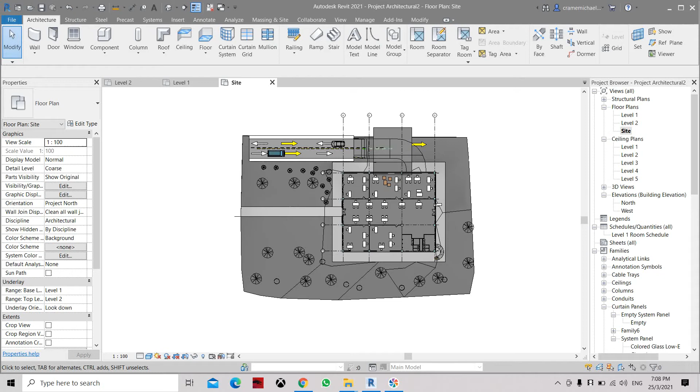Here we have the architectural plans coming from the architect. When we go to level 1, you can see that this is the architectural plans they have provided. But we couldn't find the internal origin or the project base point or survey point. We haven't found it yet.

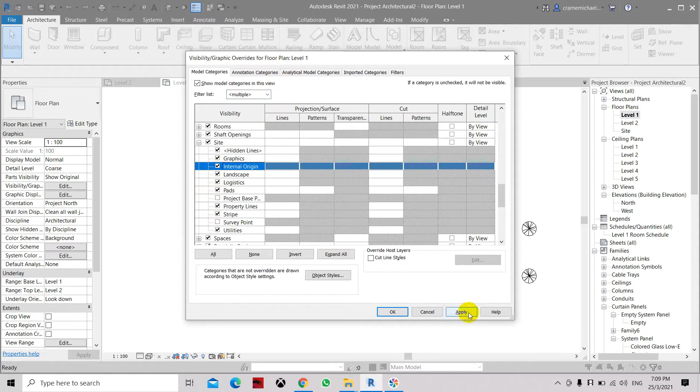So basically, if you could not locate it, you have to go to VG, or visibility graphics, in your floor plan properties. Under the model categories, you have to filter to architecture, make sure architecture is checked. And under the architecture, you have to scroll down to site, expand the site, and here you can find the internal origin. Let's check this and click apply and click OK.

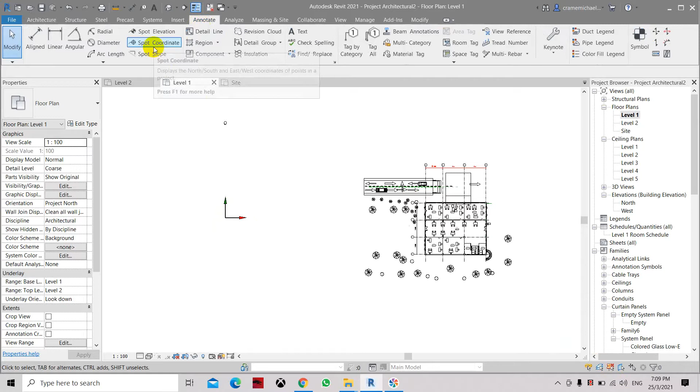Now you would see this is the internal origin which is supposed to be here. Let's see if we can still select it. Currently at the moment we could not select it. By right, we should be able to select it, and let's place a spot coordinate. Let's see what it is: it's 0, 0, 0. So it's in the correct position. Let's set 500. See this? It's in the correct position, which is 0, 0.

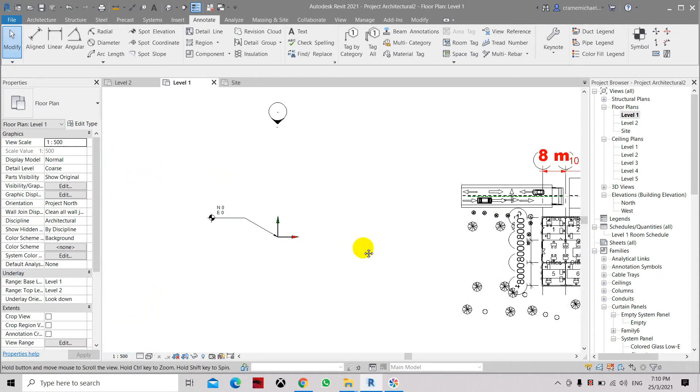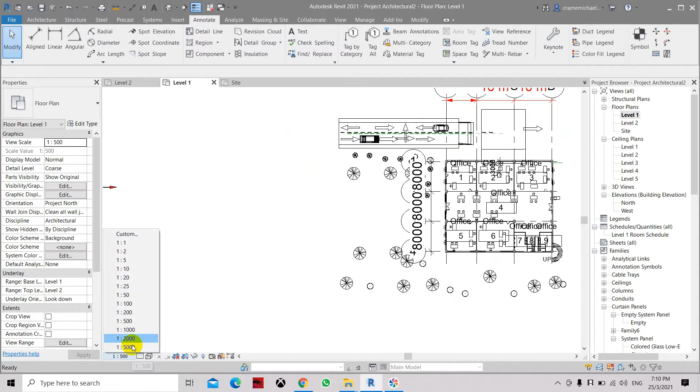A word of advice: just make sure that the internal origin is not moved, as it is typically the main reference point for any drawing or model. So make sure you don't move the internal origin. You can place the first two grids of the drawing at the center of the origin, but do not move the origin.

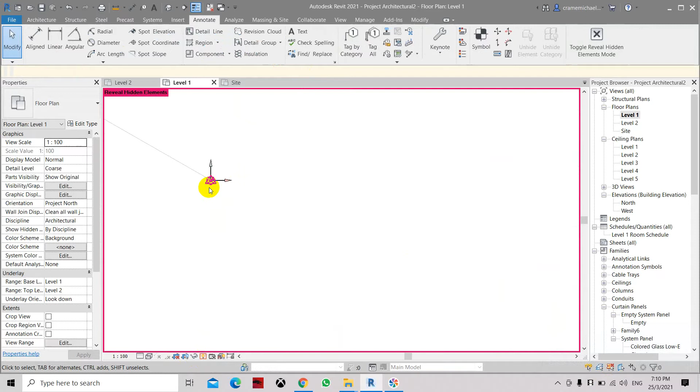Actually, here you also cannot select it. By right, we should be able to. Oh, it's hidden. Like this. So there is the survey point and also the project base point. You can also use reveal hidden elements to locate the internal origin, and here you can select it and select unhide category. So now let's close this.

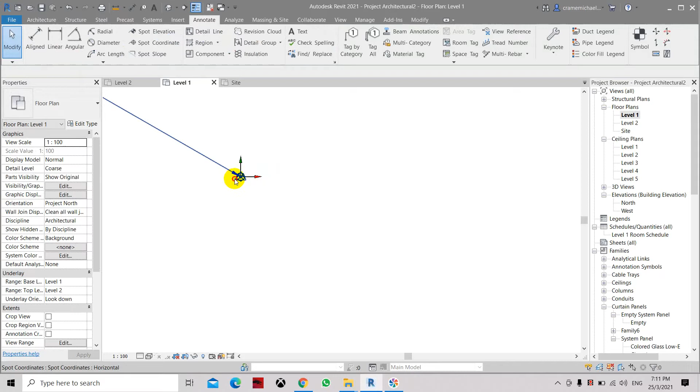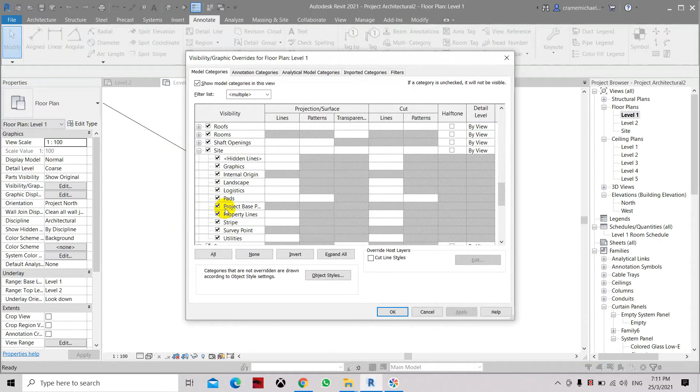Here you can find the project base point, which is shared, and also the survey point. So we have to select them one by one. We're trying to zoom in. So this is the spot coordinate and survey point. So let's hide the internal origin so we can see the survey point and project base point, how it looks. Click apply and click OK.

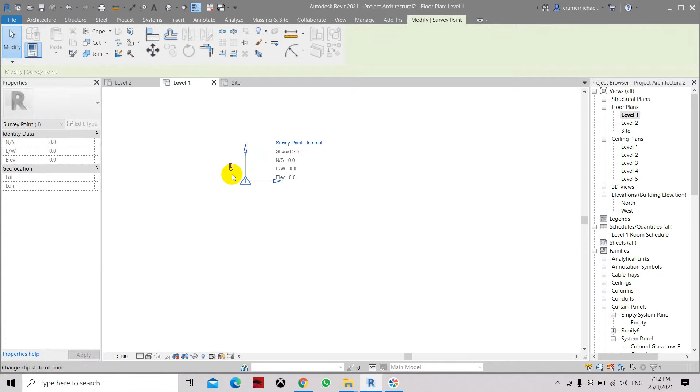This is the survey point with the clip. So this is the 0, 0, 0. So this is the picture of the survey point. Try not to move the survey point with the clip checked, because once you move it, the model will not follow. Only the point will be changed. It will create confusion for others using this drawing as their reference. So later on, when they attach some file, it will follow the survey point, but the model still remains in the same position. So let's not change this.

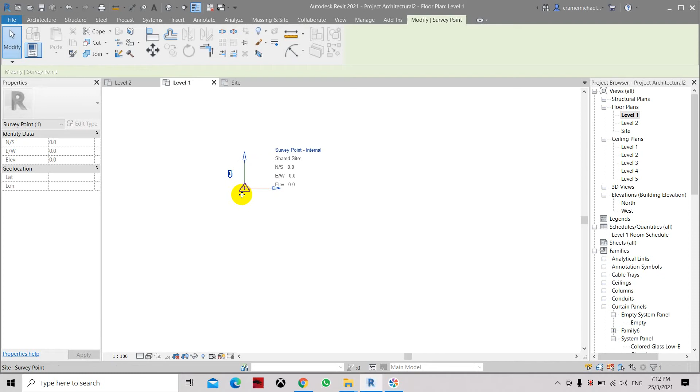Try to avoid changing or moving the survey point with the clip checked. Make sure it's always unchecked, and then you can move the survey point. Now let's hide this and see what a project base point looks like. Let's go to site and survey point, and let's check the project base point. This is the project base point.

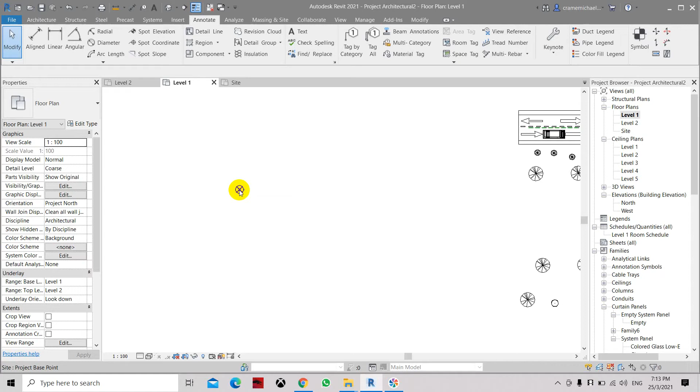Typically, this is where you can set your project as a temporary reference point in reference to the internal origin. In most of the projects we have done, the survey point, project base point, and the internal origin are all located in the same position. That is the standard in our company, and we're still maintaining it as we have never experienced any issues keeping all these points in the same location.

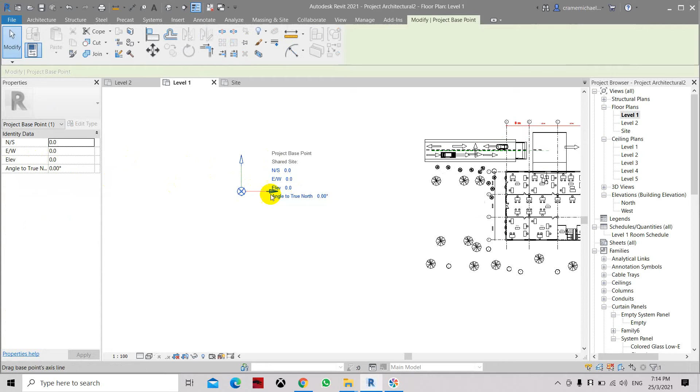Now, with the project base point, you can rotate it and actually set the angle from true north. So let's say you want to set this angle to 30. The true north is about 30 degrees, because the project north is the orientation of the drawing relative to your display and your paper. And the x-axis is always horizontal and the y-axis is always vertical.

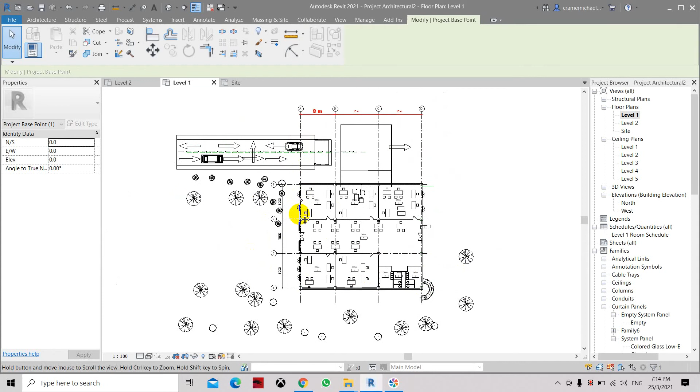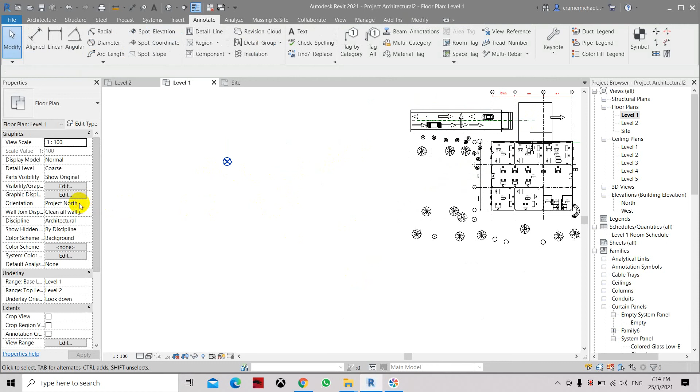But in the true orientation of this floor plan, the north may be facing this way. So let's set it to 45 degrees and see what happens. Let's set the true north as 45. And here, we're still in project north, so it's horizontal and vertical. Let's change it to true north. Now it will be shifted 45 degrees from this angle. So basically that is how you can set the true north of your building, say it's facing north at a 45 degree angle. So this is how to set it.

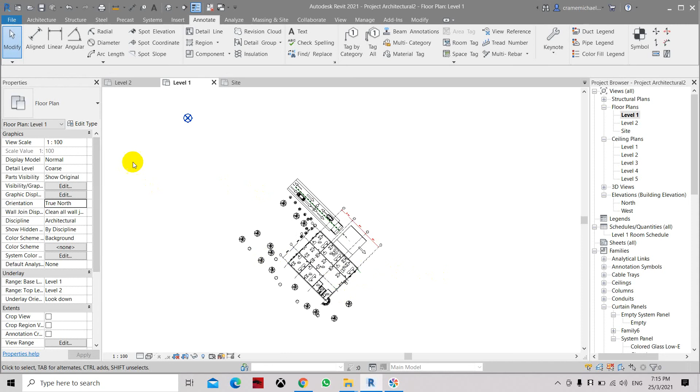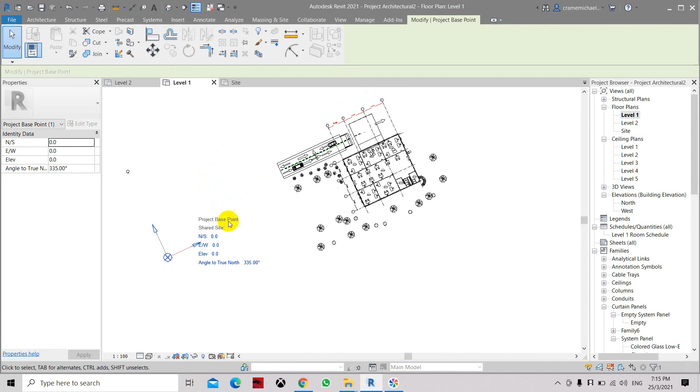Now let's go back and set this to 0. And then it will go back to the same orientation as the project north. Typically, project north and true north are not always the same. Let's say it's about negative 25 degrees. So it will be 25 degrees upward. So now it's oriented based on this reference. So that is how to set the angle to true north and also how to use the project base point.